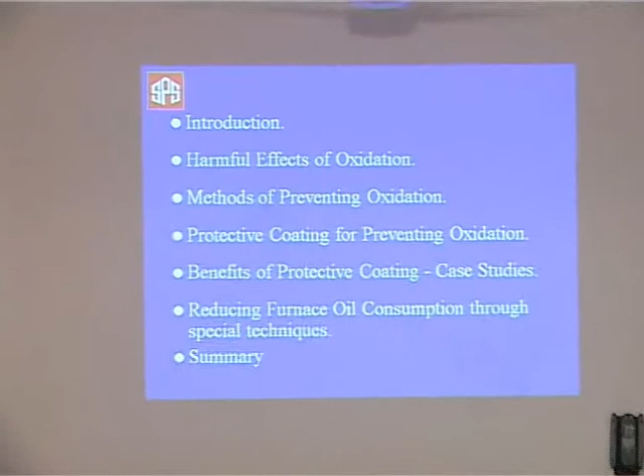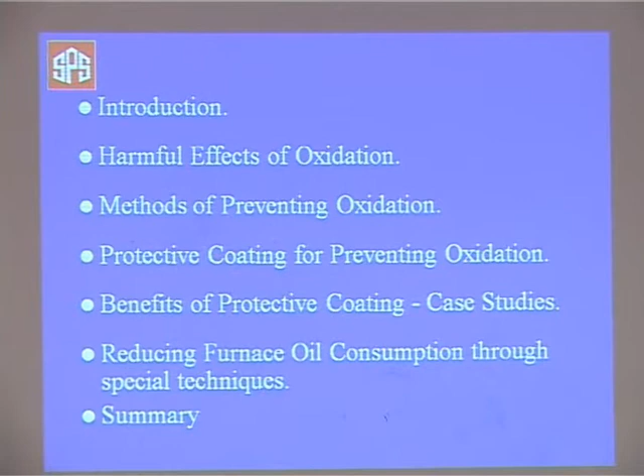The bonus subject for today is reducing furnace oil consumption through special techniques. I will be covering some techniques which are quite important in this area, because everywhere we're talking about reducing fuel consumption and reducing maintenance downtime. This is an area where we have done some interesting work.

All these case studies, I have tried to include pictures wherever possible. It's my pleasure, and I'm really excited to share all these case studies which have been developed over the last 25 years.

Moving to the first subject, heat treatment, like we all know, is a very important function in the manufacturing process of engineering components, machine parts, castings, forgings, etc. It can either add value to the already value-added product. We take the raw material and make it into useful shapes, and then we desire to administer certain characteristics into it by heat treatment.

But due to certain parameters, oxidation occurs, scaling occurs, and we get rejections. What exactly is oxidation? Like the name suggests, it's inclusion of oxygen, as simple as that. Oxygen has a thermodynamic affinity to metal, and while heating for heat treatment or forging, oxygen combines with metal to give metal oxide. The same oxygen responsible for holding our lives together is also responsible for causing crores of rupees of loss every day, and equal amounts are wasted due to disposal of scale and such non-productive activities when it comes to heat treatment.

These are the general reactions that take place during scaling: we have oxygen combining with metal, and we get metal oxide.

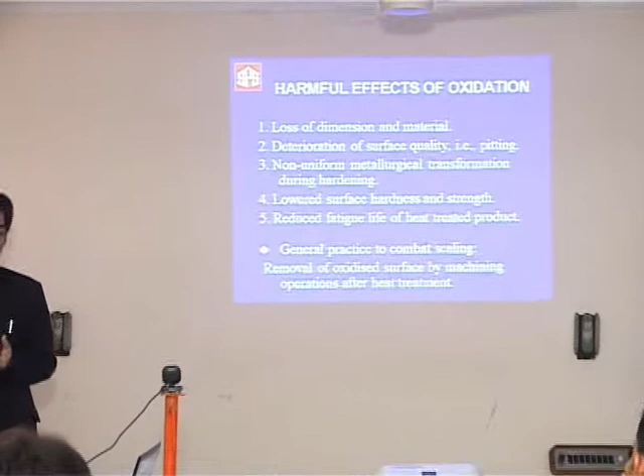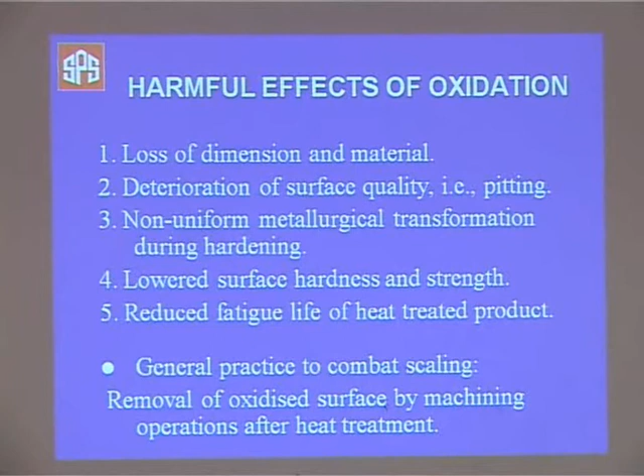The general practice to combat scaling, as mentioned before, is leaving an allowance for machining, and after heat treatment, removal of the oxidized surface by machining operation is carried out. However, I'm going to speak about protective coatings which have either proven to completely eliminate scaling or substantially reduce the scaling effect. As we studied before, oxygen and metal combine to give metal oxide.

So what we do here, well, before we get to the coating part, I'd like to dwell on certain other methods of preventing scaling. The first one is copper plating prior to heat treatment, though it's a time-consuming and expensive affair, since we would have to spend time removing the copper plating after heat treatment. Use of molten salt baths is slowly losing ground because it's not environment-friendly and it's quite polluting.

Use of protective atmospheres, well, endothermic and exothermic gases like nitrogen and ammonia. It's a common practice, but again, it's an expensive practice. Use of vacuum furnaces sometimes is also quite capital intensive, and it could be quite prohibitively expensive.

Switching over to grades not requiring heat treatment, well, we do not have many options over here. Not many grades are available where we can actually eliminate the heat treatment part.

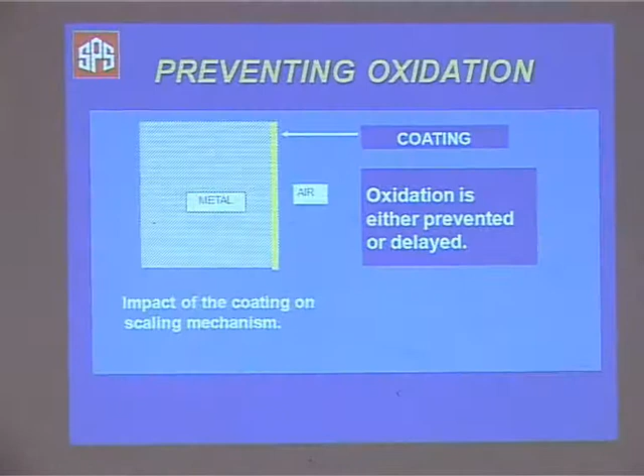And lastly, we come to the use of protective coatings. Like we have spoken before, we simply create a barrier between oxygen and metal such that the oxygen does not combine with metal. A simple representation would be this one. This yellow layer here is an anti-scale compound which is applied on the component or the billet, whatever the case may be, before heating or heat treatment, and the air is not allowed to interact with the metal. Oxidation is either prevented or delayed, and this is the general impact that we have on the scaling mechanism.

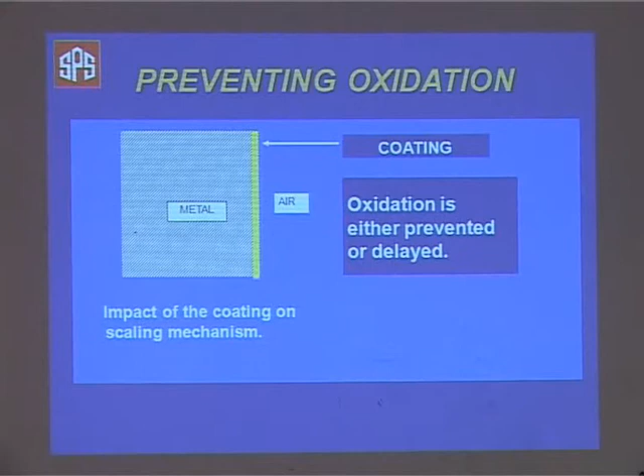Now, the benefit achieved over here depends entirely on the temperature and the soaking periods. What I will be sharing with you all is a number of case studies, and we can have a better understanding of the subject. Of course, before we go about using an anti-scale compound, it's necessary that we make sure that it does not react with metal.

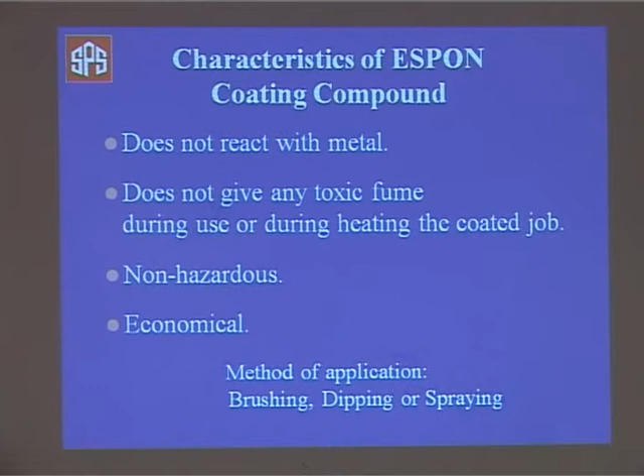That will entirely defeat the whole purpose. It does not give any toxic fume, because during storage or use or during heat treatment or disposal, at all stages we have to ensure that it's environment friendly and eco-friendly. It has to be completely non-hazardous because it should be easier to use at the end of the day.

And of course, it should work out economical when we are comparing an anti-scale compound to so many other factors like copper plating and vacuum furnace. So it definitely needs to work out more economical. The method of application should be simple because we are talking about a large number of components to be heat treated, either forging or casting. Some of the common methods of application would be brushing, dipping, or spraying.

Benefits of using protective coatings, well, prevention of scaling. I'll be giving case studies for all these points. So let's take the first one.

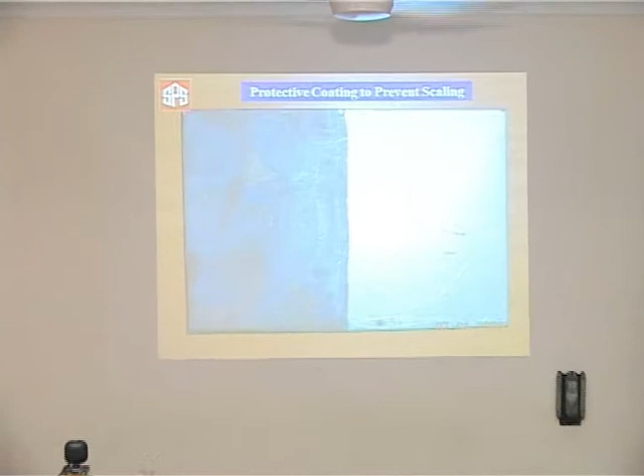This is a stainless steel sheet. As you can see, this half of the sheet was coated with an anti-scale compound, and after heat treatment, after solution annealing, and a little bit of buffing, you can see the remarkable difference between the not coated area, which is over here, and you can see that scaling has developed, and the aesthetic appeal of the sheet is spoiled, and so you can see some pit marks over here, whereas over here you can see a fairly good finish.

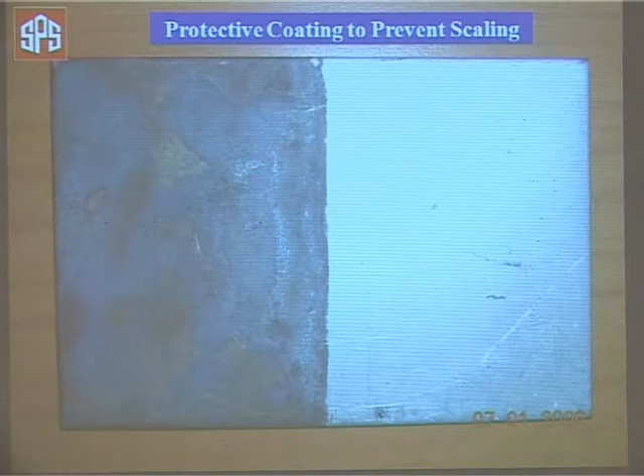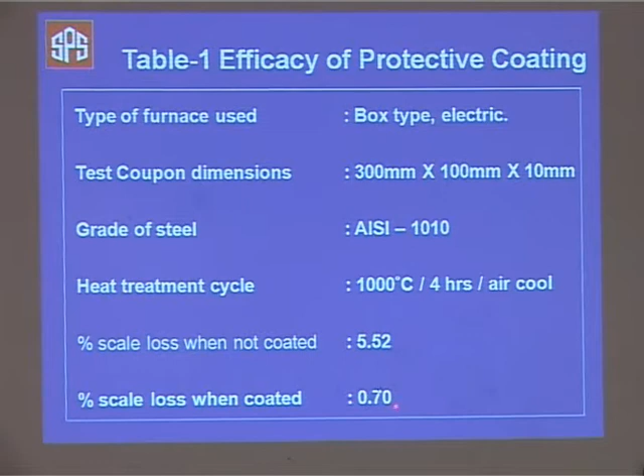This is a tabular representation of the same thing. The furnace used over here is a regular box type electric furnace, and grade of steel AISI 1010. This is your heat treatment cycle, and you can see that the scale loss when coated, we had a saving of 4.82% approximately. When not coated, the scale loss is 5.52, and it has considerably dropped when we have used an anti-scale compound.

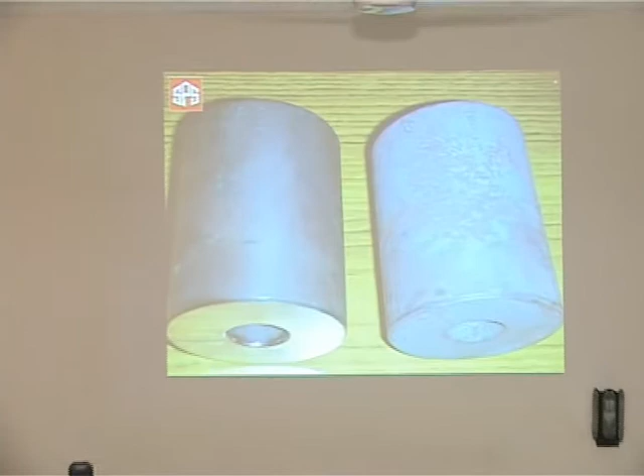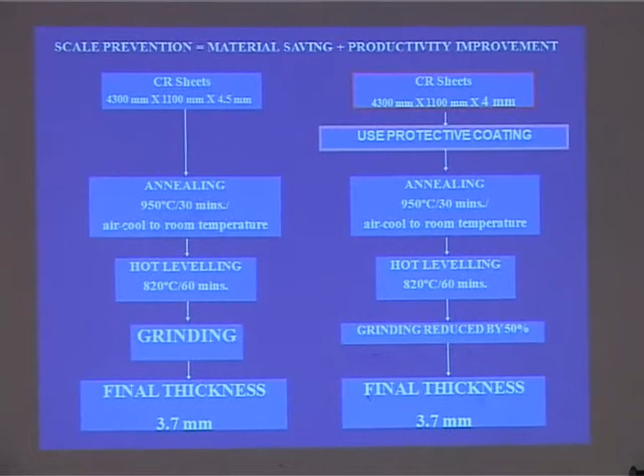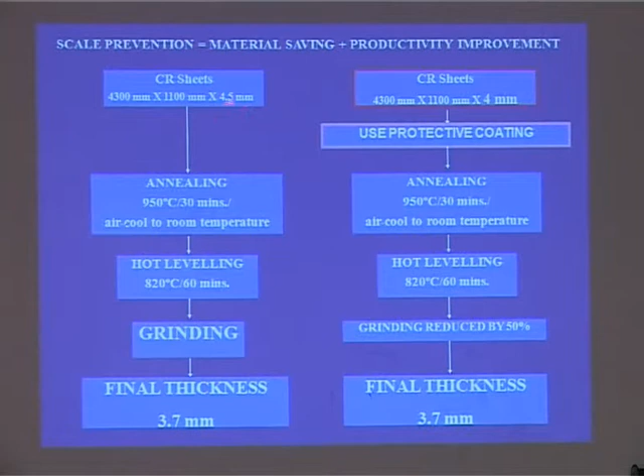This is an interesting case study in case of alloy steel, quite an expensive one, where the end thickness, the final thickness that was desired was 3.7 mm, and they started with an initial thickness of 4.5 mm. The remaining portion was left for grinding, which accounted for loss due to scaling.

Now this is quite an expensive alloy steel, and after using an anti-scale compound, after trials, we came to a conclusion that the allowance could be reduced up to 4 mm. That is, we could reduce 0.5 mm from the initial thickness, and the use of protective coatings before charging them into the furnace. Annealing, the cycle time, everything is the same.

Grinding time was reduced by 50%. Time and material were saved here. The final thickness achieved is the same, and this saving of 0.5 mm, approximately 11%, gave a saving of approximately 43 lakhs, because it's an alloy steel grade and an expensive one. The investment towards the same was approximately in the range of 4 lakhs.

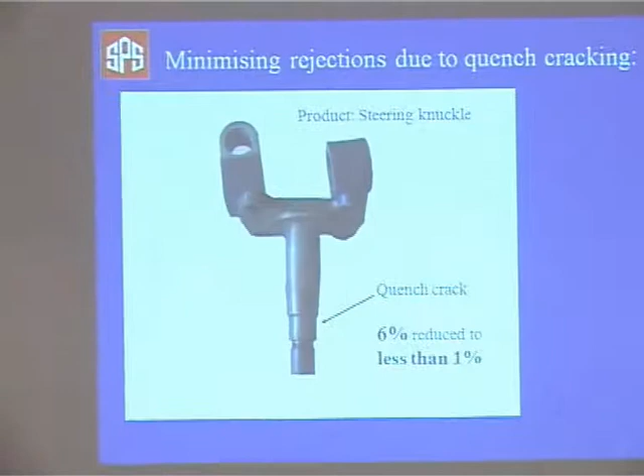Knuckle joint: our customer would usually have quench cracking in the stem area, essentially due to scaling. When we used an anti-scale compound, the quench cracking was reduced to less than 1%, where their overall rejection percentage was 6%. For a high volume product, 6% is a considerable amount.

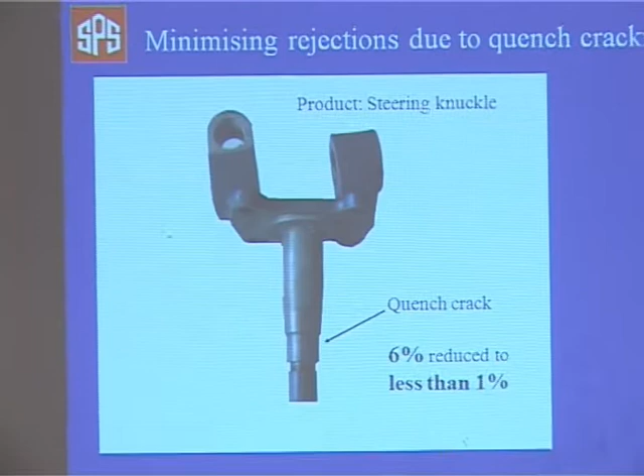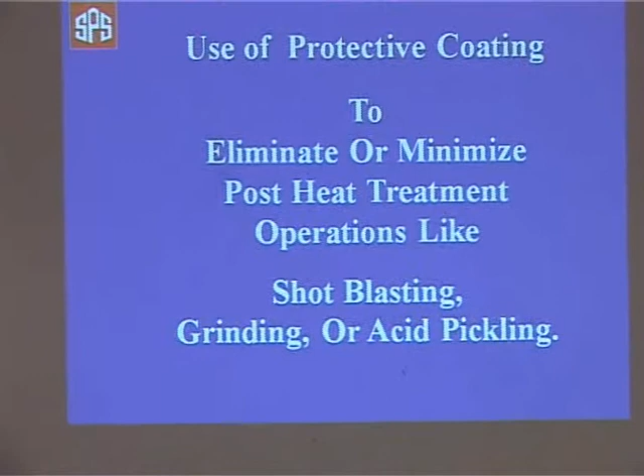An interesting area is to eliminate or minimize post-heat treatment operations. Shot blasting, grinding, acid pickling all add to time and cost, but they do not add any value. So our aim is to reduce these operations after heat treatment.

In case of heat treatment of stainless steel pipe fittings, after applying the coating, all the details are mentioned here - these are the components, and solution annealing is done here. After applying the anti-scale compound coating, pickling time is reduced by 75%, and buffing can be eliminated in many cases, hence quicker deliveries.

One of our customers at Baroda, an esteemed heat treater, said he could eliminate pickling to such an extent that when he used to deliver products in 15 days, he could reduce the lead time to 5 days. That's the value we look forward to adding.

This is a case study at Rourkela steel plant where the scaling was so adherent - I'm sorry, I don't have pictures because it was a confidential issue - that they had to shot blast it 3 times. Can you imagine shot blasting 3 times for removing the scaling? After using the anti-scale compound, very little shot blasting, just once, and they could dispatch it. So in post-heat treatment operations, we have a productivity increase of almost 66% when it comes to shot blasting.

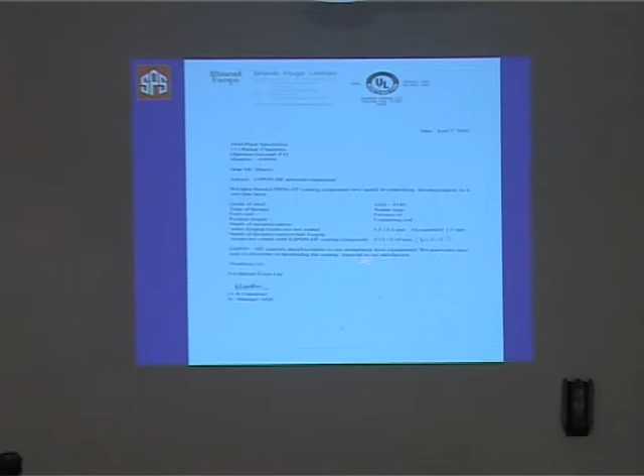Let me read out what is mentioned here. The depth of decarburization when forging blanks are not coated is 0.5 to 0.6 mm, occasionally 1 mm. The depth of decarburization when forging blanks are coated with an anti-scale compound is 0.15 to 0.20 mm, and that too partial. So they have certified that it controls decarburization up to their accepted level.

Salvaging of rejected components: we either have 2 options. One, we scrap them, or we salvage by reheat treatment using protective coatings. The first example would be...

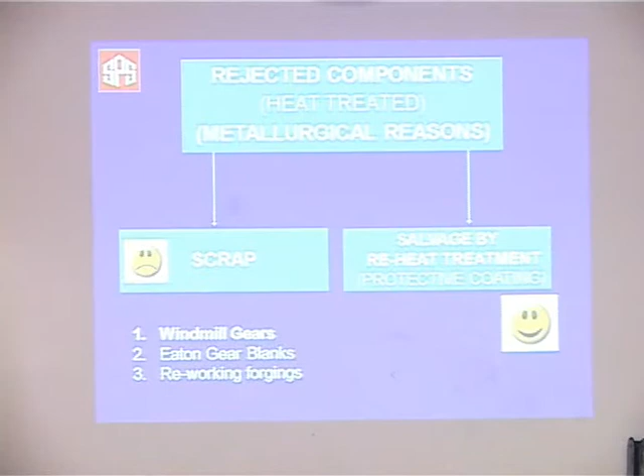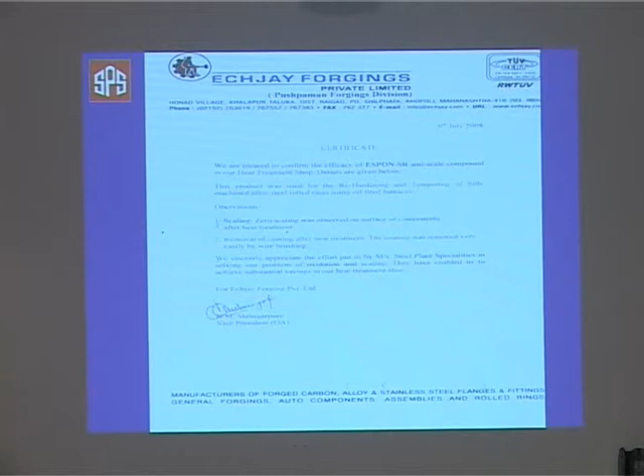At Echjay Forgings Private Limited, Pushpaman Forgings, Khopoli - I'm sure many of us are aware of - they had to re-harden fully machined windmill gears. It was used for re-hardening and tempering of fully machined alloy steel rolled rings. No allowance for scaling was kept here because they were fully machined. Any amount of scaling would ruin the components, and these are quite high value components.

One ring costs approximately 1 lakh rupees, and they had to reheat treat 52 of such components using an anti-scale compound. What they have certified is: zero scaling was observed on the surface of components after heat treatment, and removal of coating was also possible very easily by wire brushing.

Now the question here is, you're talking about salvaging 52 lakhs of rupees worth of components. How much would you happily pay to salvage 52 lakhs of your components? The investment towards this entire operation was in the range of 30,000 rupees.